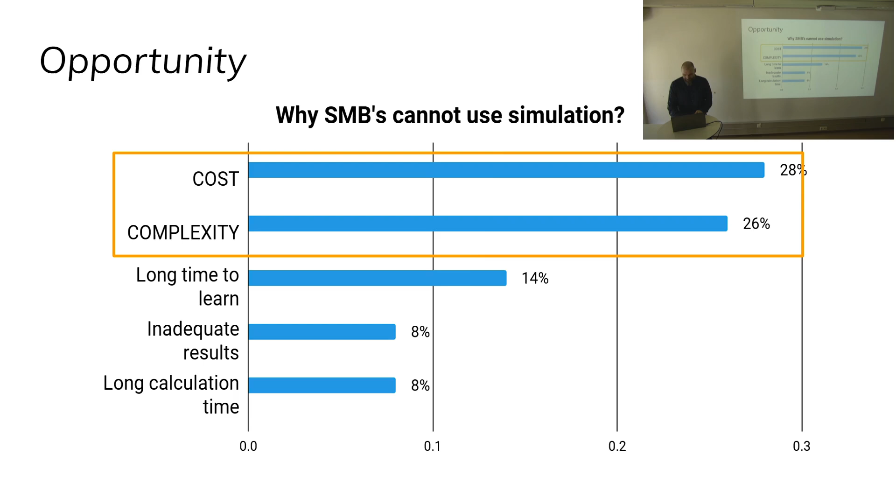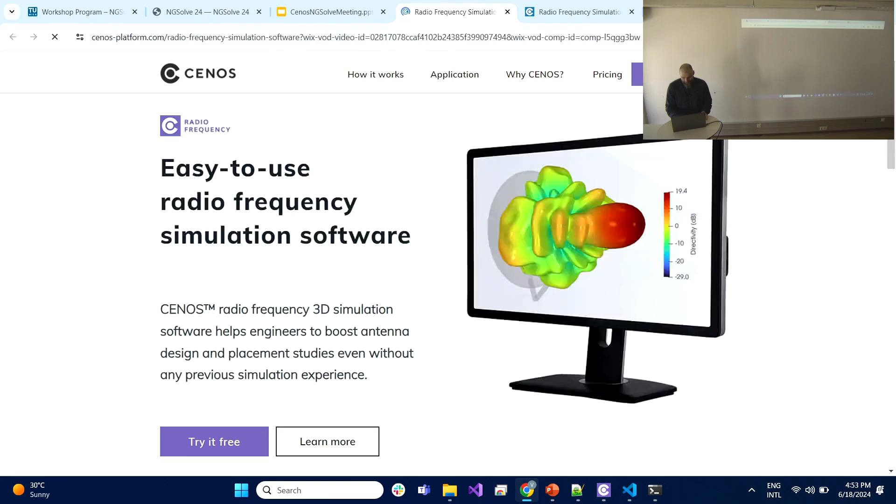We saw this as an opportunity because it's not hard to be cheaper than ANSYS. At the same time, if our software is very focused and very easy to use for engineers, we might get our share of the market. That's how 7 years ago we founded CENOS, 3 PhDs without any experience in selling stuff. From now on, I'm going to show only some nice pictures because, like Simon said, engineers want to see nice pictures. I wanted to make a live demo, but I had the gut feeling it won't work, as always with live demos. So I took a video which our sales team made for me.

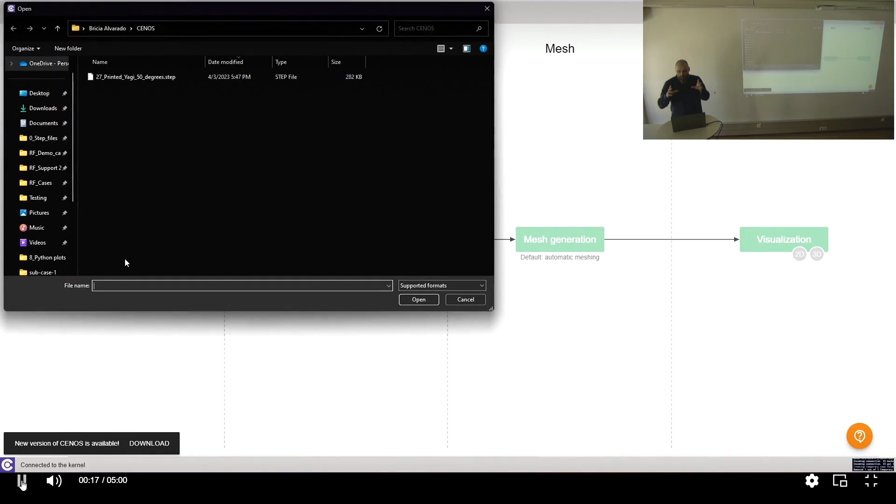So what's the idea in our software? This will be a radio frequency demo. The user can select a template, like patch antenna or dielectric antenna. Everything is predefined; he just selects the dimensions and simulates. He can load CAD or use the geometry editor. In this case, we're going to load CAD for a printed Yagi antenna on a CubeSat, these small cubic satellites which are shipped to space in great amounts.

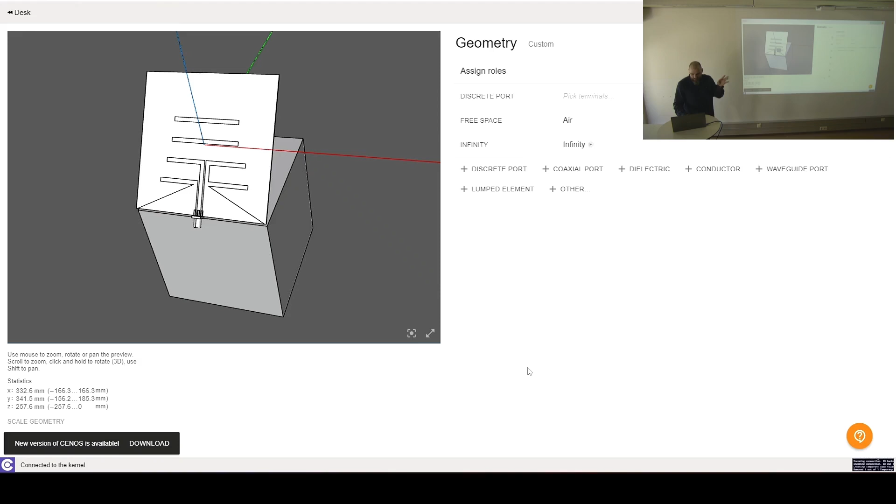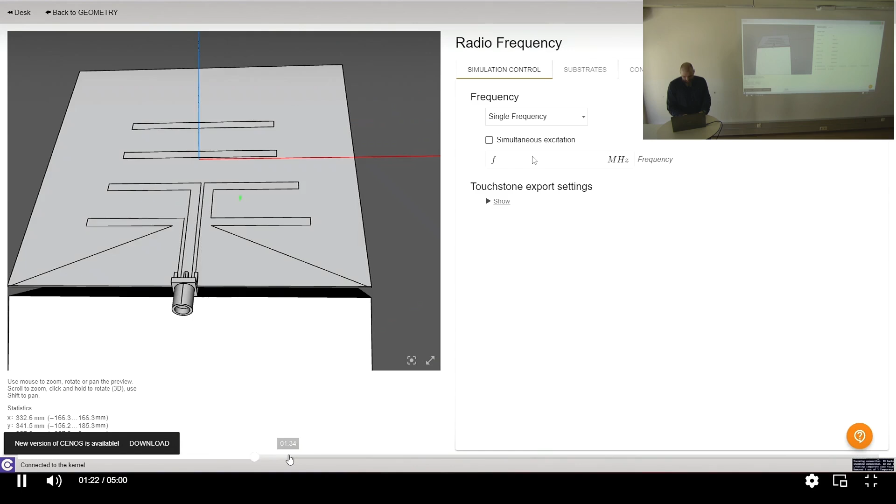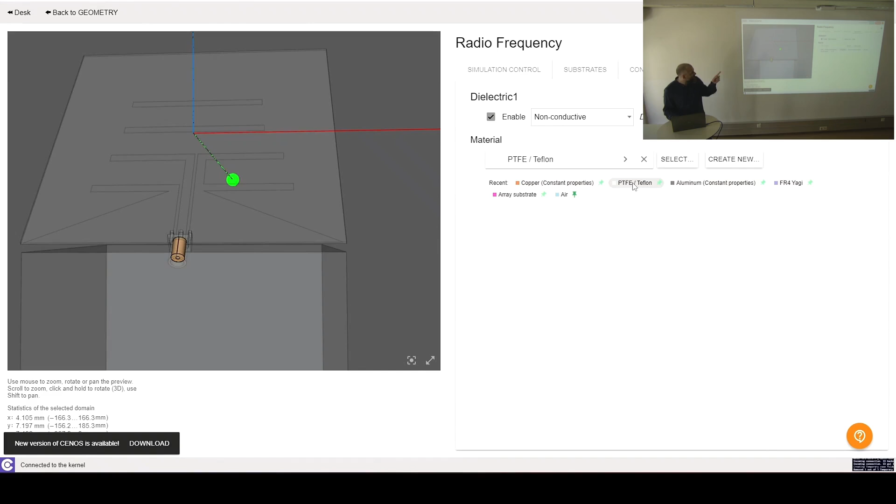Then he can add air, and our approach is slightly different from the generic software approach. We ask him what type of application he has. This time we selected custom, and the user has to select where the substrate is, where the patch is, and so on. When he has defined it, let me quickly scroll through, we go to physics. We define the frequency and the material parameters, possibly from our material library. Perfect conductor is mostly used; oh no, this was Teflon. Then we define a port, a coaxial port with a 50 ohm impedance, and then we press run.

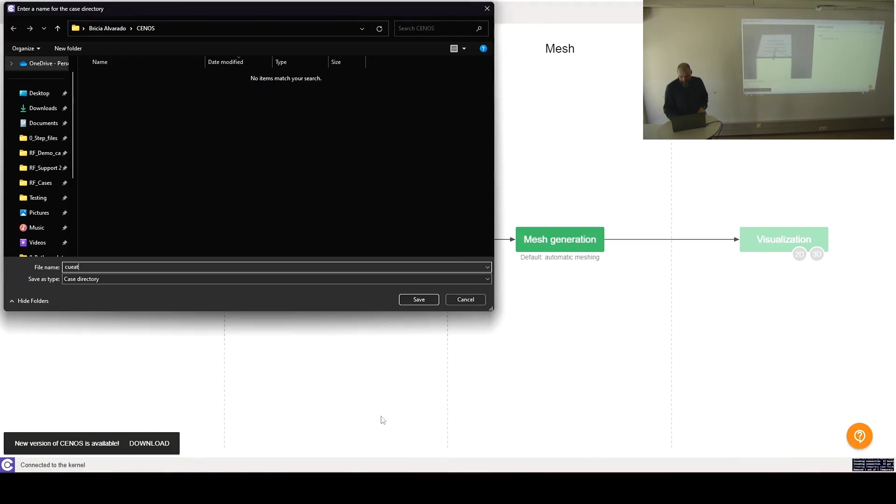When we press run, it asks you to save the case, and then it simulates. It doesn't usually happen so fast, the simulation. Then you get results, all inside our software. Here, for example, we see the S-parameter, which is very important for RF engineers. It shows the reflection coefficient, in other words, how much of the energy sent from the source to the antenna is reflected back to the source. If this reflection coefficient in decibels is very low, then it's good; you're probably radiating.

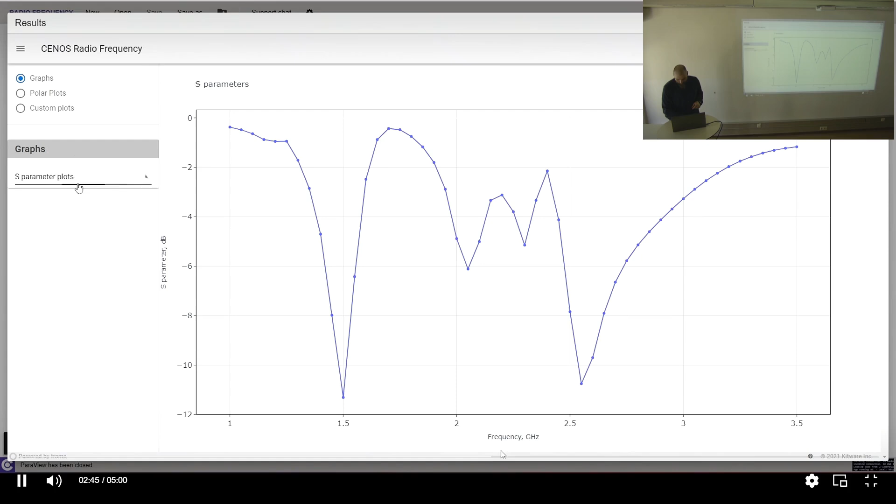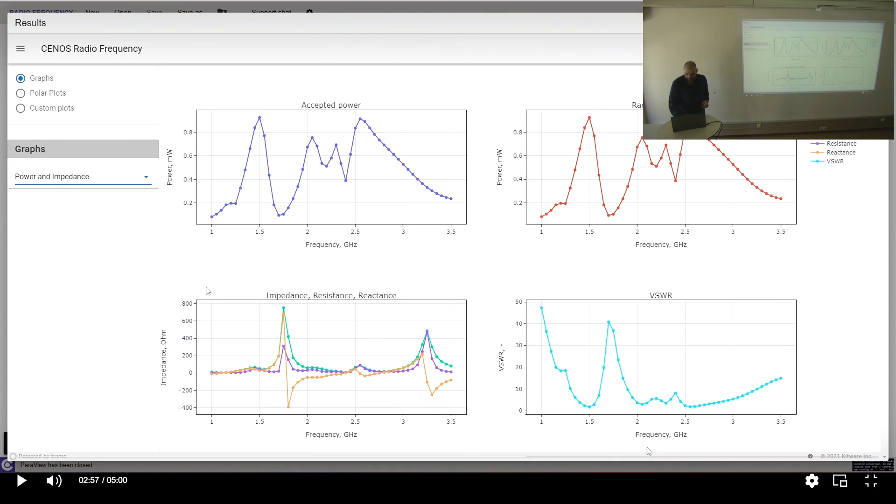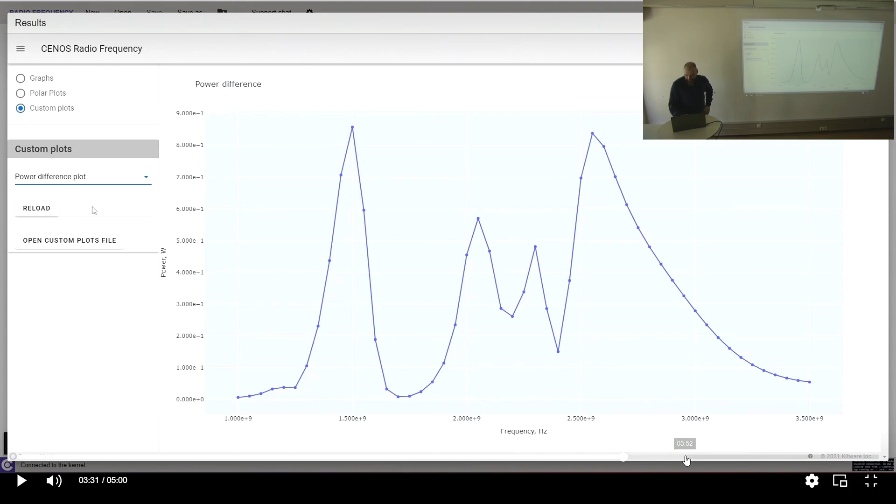Let me check, there is some more. For example, here is the radiated power. It's kind of the inverse of the reflection coefficient, because at the same frequencies we have peaks; most radiated power is at 1.5 and 2.5 or something. We can also view polar plots. When this video was made, probably half a year ago, we didn't have 3D plots in our software. Now we have everything inside, but we can still use ParaView for more advanced post-processing. Here you see the directivity, which is the far field, showing in which directions this antenna radiates well.

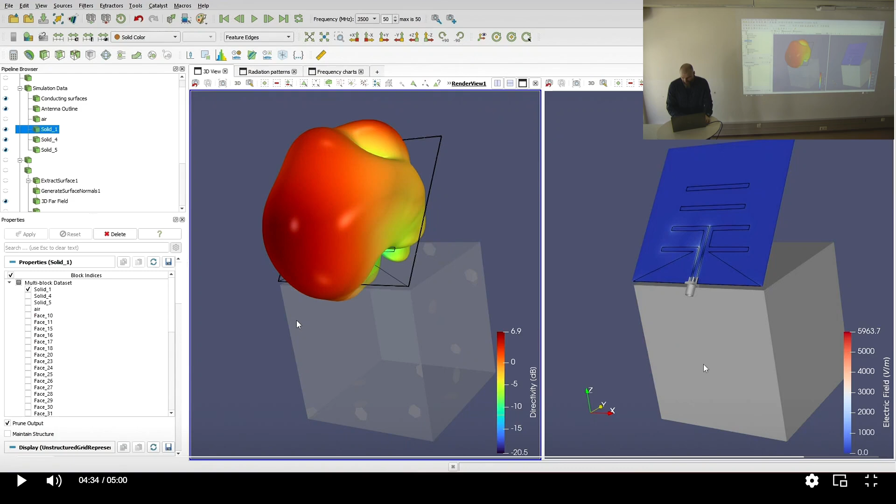Yeah, that was my short demo of what we have made. So this was an example of radio frequency. We now have 4 apps. The first one is radio frequency. We have customers who use it for different applications like drones or RFID, which we all use every day, even satellites. Here are some nice pictures for you to have an inspiration of what is interesting for industry.

This is interesting to calculate how the far field of the drone antenna looks. Sometimes it makes sense to calculate an antenna without the drone, but the drone can also have some dielectric materials or metal parts, so it can affect the far field. And this is the RFID transmitter, I guess.

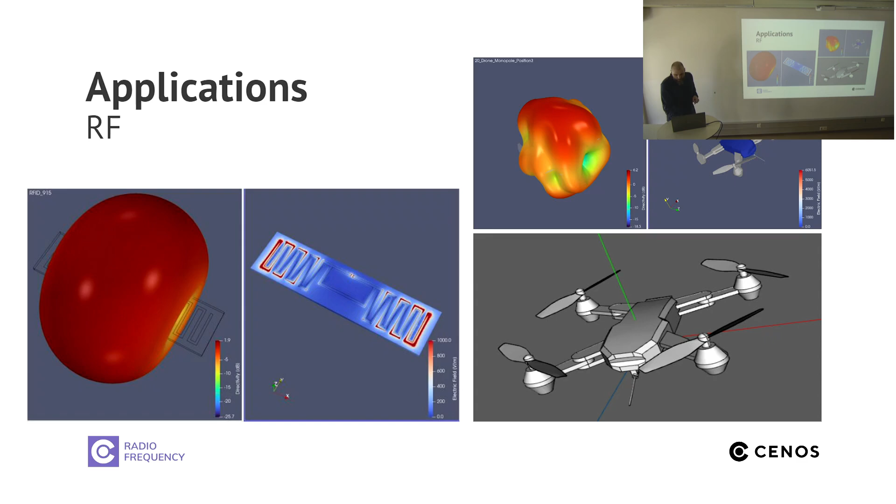Other applications. On the right-hand side, you see again a CubeSat, a slightly different one. And here this is a patch array. Arrays are actually quite interesting, because you have multiple antennas, like here it's 4x4, so 16. You get your far field, but you want your far field maximum not in this direction, but maybe in that direction.

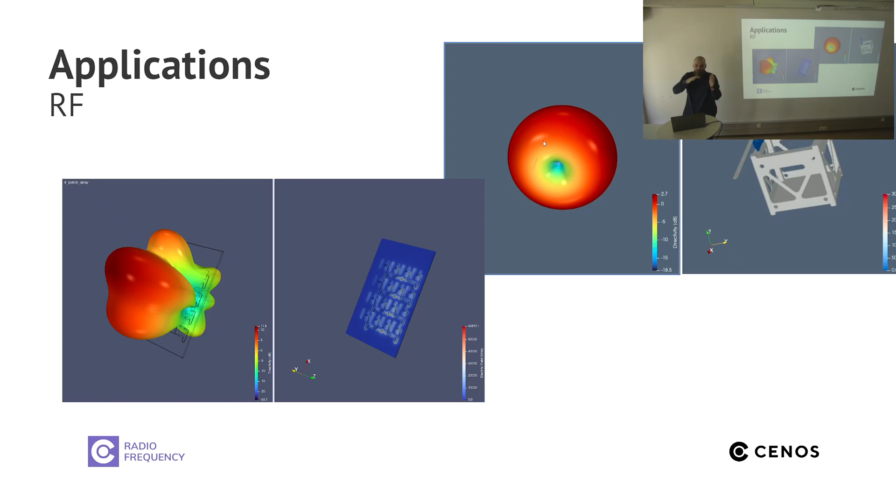And you can steer it by changing a phase shift in your patches. So you have many small antennas. If you change the phase shift, you suddenly can get your maximum in that direction or that direction. That way you can enhance your communication between antennas.

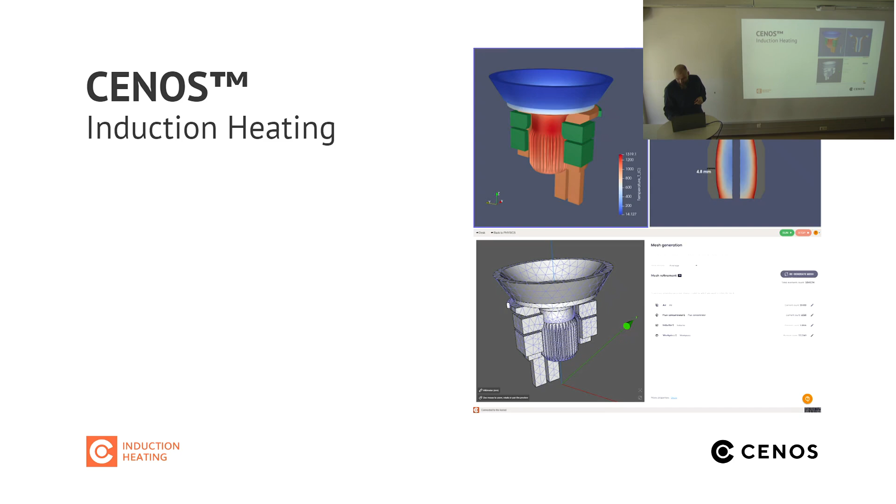Hardening happens as follows. You first heat up your workpiece to almost 1,000 degrees. It depends on material, but you have to be above austenization temperature, and then you quickly cool it down. You quench it with a kind of shower, and you suddenly have harder material. We have many different applications where this is used.

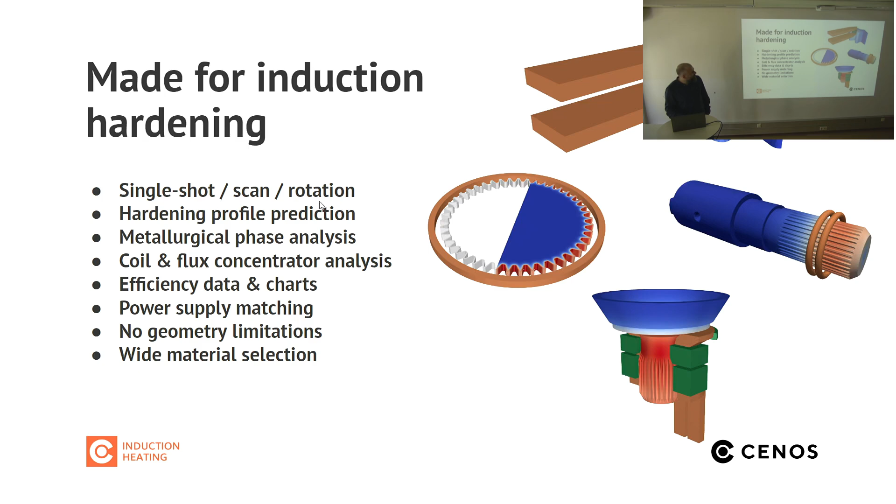For example, this is called gear root hardening. This inductor hardens the root of this gear. There are different ones which allow you to harden the tip of the gear, very different approaches. And one thing many of our customers like most is that we allow scanning and rotation, which is very easy to set up in our software. I'll show that in the next slide.

But basically, it's all about the design of the coil, because you want a coil which provides efficient heating. It is fast, efficient electrically, and the coil has a long lifetime, because hardening is a very fast process. You heat it up in maybe 2-3 seconds, and then quench it in another 1 or 2. So your coil is also heating up, cooling down, for probably 10,000 cycles or something.

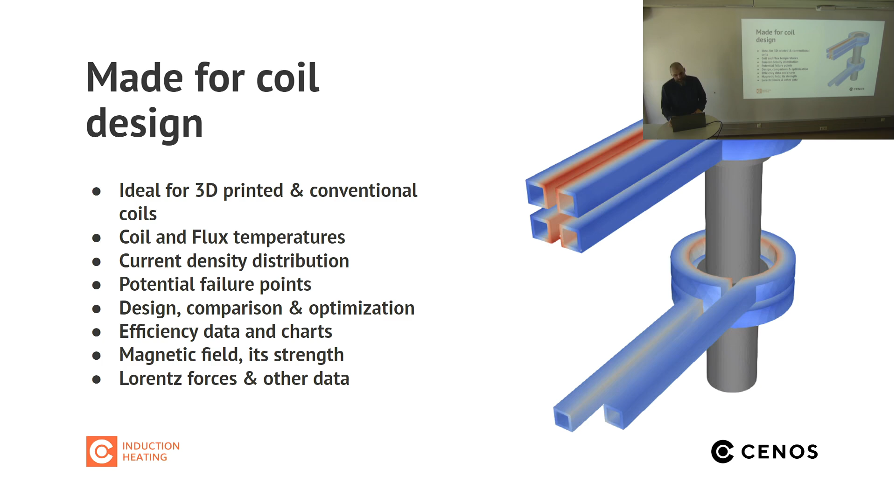And every coil has a lifetime. It can be 5,000 cycles, or 10,000, or maybe 20,000. So if you optimize your coil so that it doesn't have hot spots, or even some mechanical stresses, then you can design a better coil.

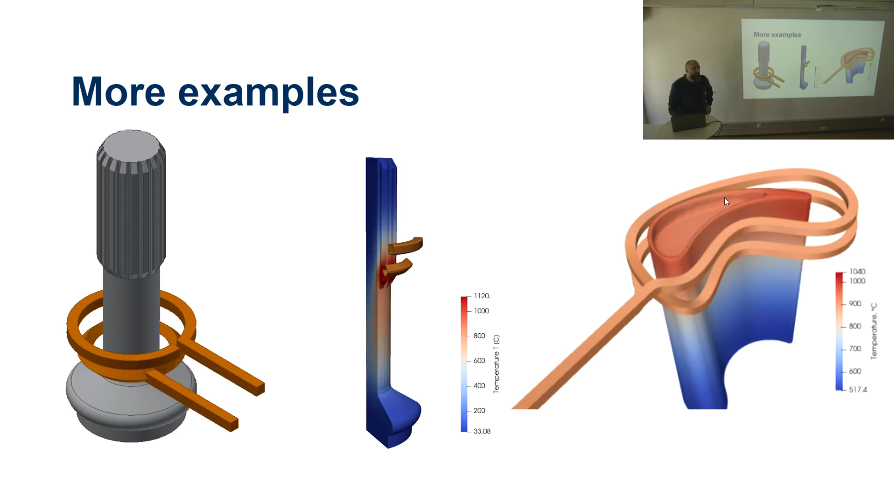About scanning, the idea is that you have an inductor which provides very localized heat, and then you just scan your piece. This is very easy to set up in CENOS. We automatically move it. This example is turbine blade heating. This is more or less the same as before. Here it's just rotating inside this inductor. These green ones are flux concentrators, and then you get a uniformly heated workpiece, which is then quenched.

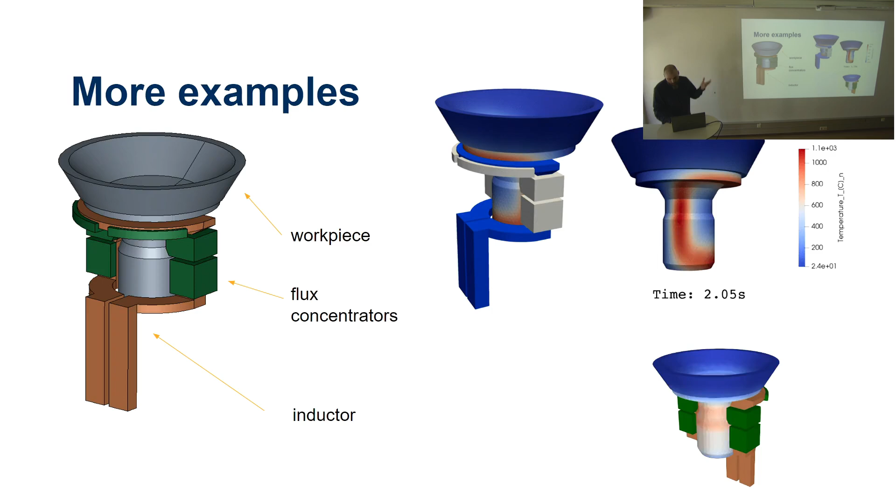And the third app, where I don't have very sophisticated examples yet, unfortunately. But here we have two very nice features which people like. First of all, we again have motion. This motion is important because now in Sweden they are trying to build a road where you drive your EV car and you charge. So this kind of system simulation is important, and it's very often coupled with your circuit, so we coupled it with LT-Spice or external software, which allows you to calculate this part externally and then couple it with your FEM model.

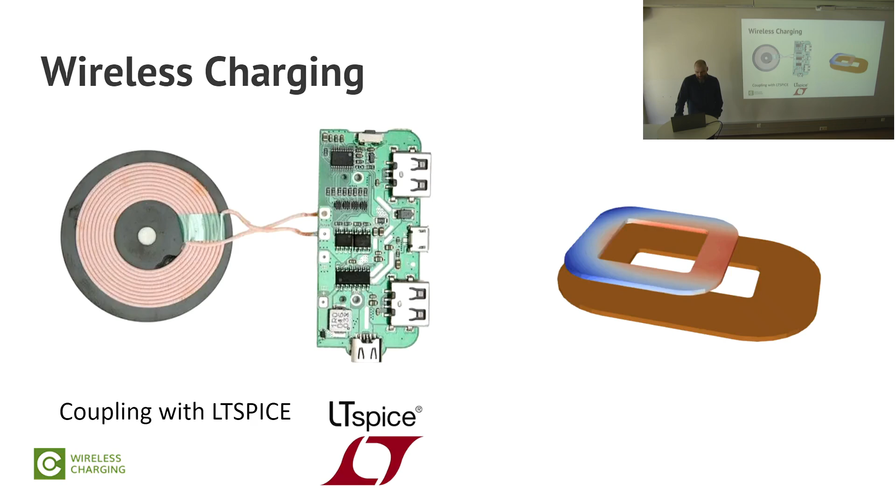So far we are using NGSolve, but it's not the only one we are using within our software. It depends on the app, on the application. So we have different options there.

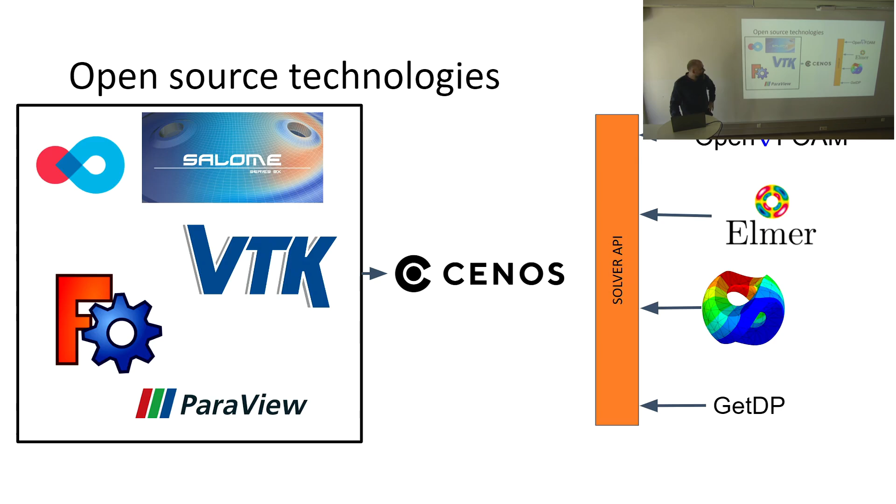And I'd love to challenge you as a community, or each one of you as an individual who is interested in such a partnership. We have a long list of things we want to implement in the nearest future, and we are looking for partners who are capable and willing to have a partnership with us in terms of solver development.

But I have also seen very nice theoretical mathematical work here, and I want to challenge those guys to bring these things forward, so that they don't get lost in scientific papers, but find an application. You've noticed that of the applications I showed you, none of them was a unit square.

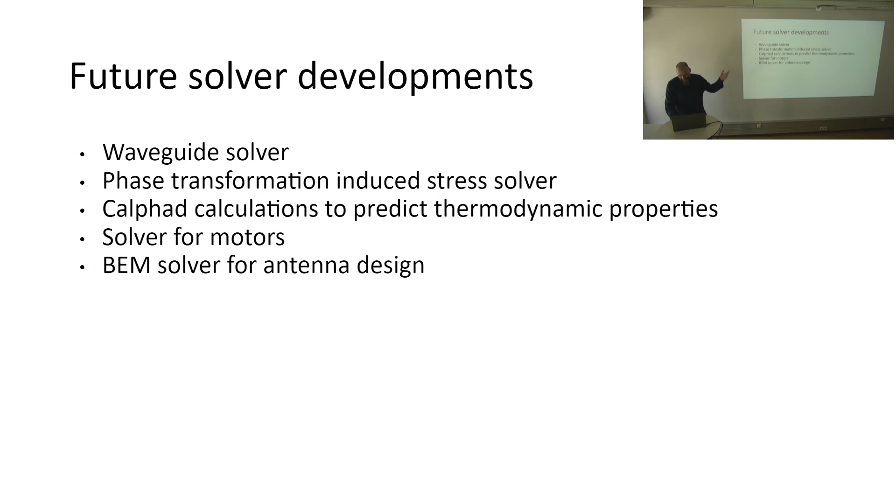So probably it makes sense for you to ask the industry what's interesting for them, and try your solvers on examples that fit their needs, and maybe in that way you can in the end have an answer: is your work or your solver really good in some niche? And I believe that for every work you can find a niche where it may outperform the others. So that's kind of an invite or challenge for you guys to think about it. Yeah, that's it. Thank you for your attention.

Thank you, Vadims. We will also give the challenge back: give us the geometries now. Sure. But for sure, ask him. I think this is something that requires a sense of community. That community is not only academics, but also these industry guys who know what's required, and you just approach them and say, hey, I have this cool idea, maybe an application where this can be used. Maybe we can find out how to test it, how to validate it, how to benchmark it. I think we have to come closer as a community in terms of this partnership.

So in terms of application testing, the app in the end you sell to the customer. In your experience, what do the customers really want? Do they want as little information as possible, just some drop-down menus, push go and get it? Or do they want more options, or what is actually required?

Yeah, that's actually, I think, why we are able to sell something, because we are definitely not there in terms of what ANSYS has. They have more features for sure, but we can still sell to people just because we are much simpler and we offer them these very simple drop-downs. I know some people who, when we approached them, said, "Oh, you're too simple. You don't have this, you don't have this. I cannot modify my own equations." Okay, you're not our customer.